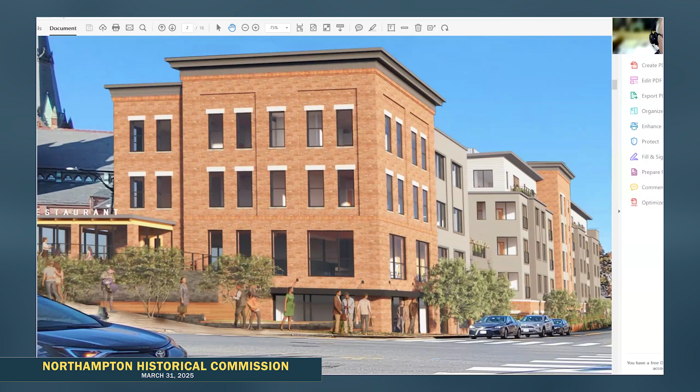We are maintaining a larger glass here into the restaurant on the second floor, which is interesting because the first two floors of this building are commercial. We have the cafe downstairs off the park area, then the restaurant up above, and it's not uncommon even in the downtown buildings to have these larger openings, peering into the main public spaces of the building. We're adding, as you can see, some...

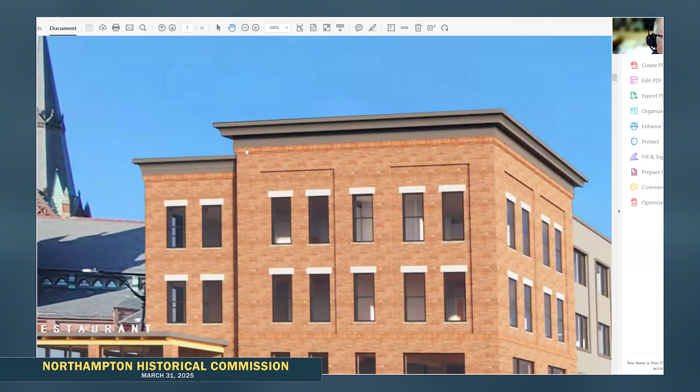Actually I have some detail shots that are going to be a little more helpful than this shot. I think I'll get into some of the brick detailing aspects when we're looking at those images.

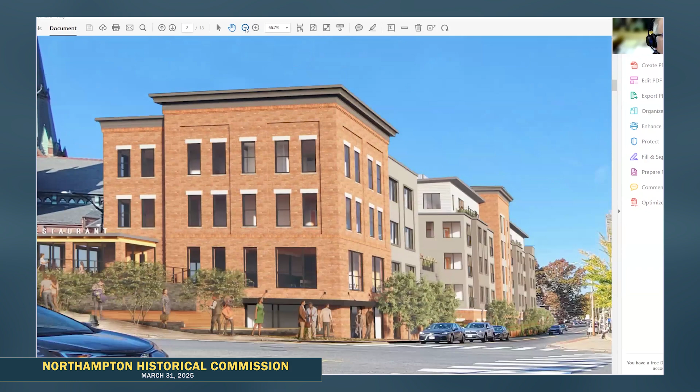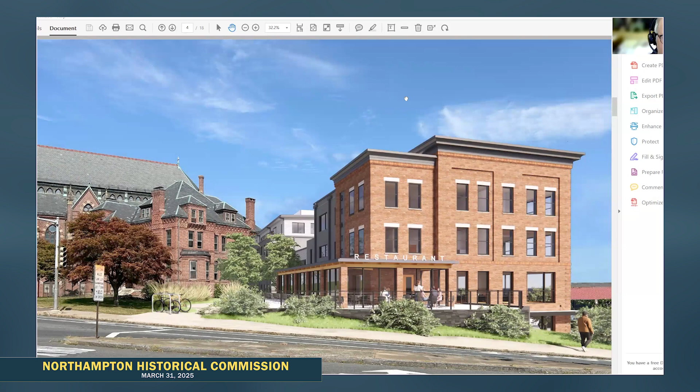This is as you move up the street, looking into the upper terrace of the upstairs restaurant. This again was the initial design you saw last meeting, and here's how we've modified it. You get a sense of the cornice being a nicely proportioned cap that helps anchor the building. We think visually it picks up on the brick detailing and adds another layer of interest and historic relevance to the building and its relationship to the downtown fabric.

I do have a Google Earth shot of the street, which I can bring up a little bit later, just to give everybody a reminder of what downtown Northampton looks like.

Not that you necessarily need it, but moving up the street, this is what we saw last time, and the big difference again is the addition of this cornice line along here, because in this elevation we're not really changing the window patterns, the fenestration, or the idea about the signage, but as you turn the corner, you will pick up the read of that cornice line.

So just to back up, as you're coming down the corner...

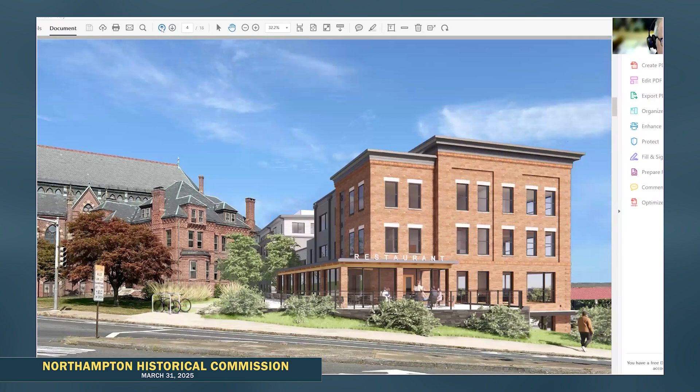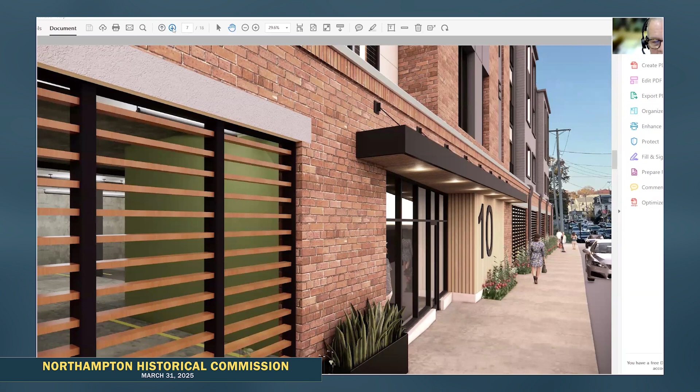This is a view of the entry that we showed you last time, and this is what we've really been focusing on with the planning board, is what this pedestrian experience is like along the length of this parking garage elevation of the building.

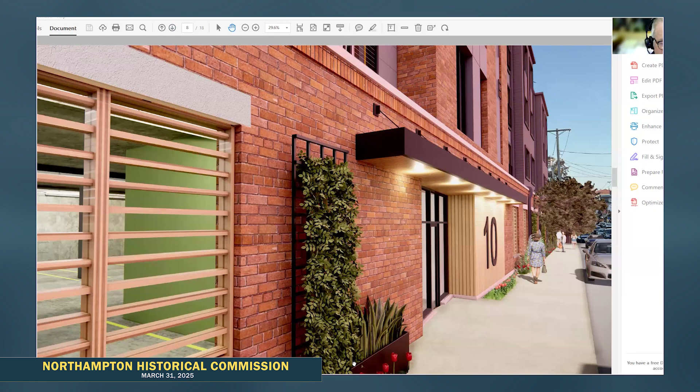So what we've done here is we've added these trellis planters, which are going to extend out of the ground planters that we have, which are all part of the stormwater drainage for the building, capturing downspouts. We've added street trees in along here, I think 6 or 7 street trees, which again is going to help soften and humanize and make this a more pedestrian friendly street, cooling and helping reduce heat island with these trees, and creating more shade.

This is the view from last time, and then how we're currently envisioning it, with the addition of the trees and the planters.

Again, you can see how these downspouts come down here and then run behind these wall planters, and then into these stormwater rain gardens here along the street edge.

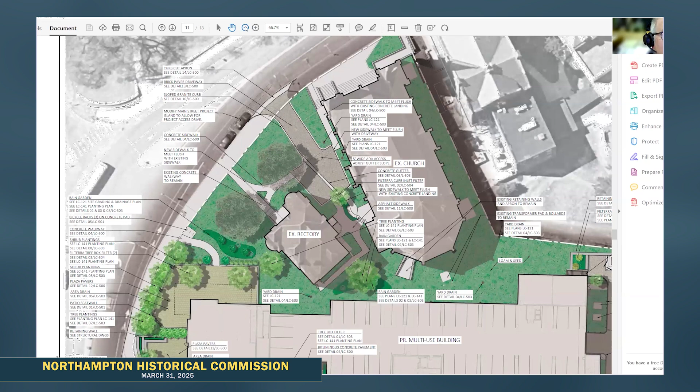These are some of the images we have of that, so just a little bit of a bird's eye view of the outdoor dining for the restaurant, and stepping down that lower terrace off the cafe that's right on the corner of Elm and Main.

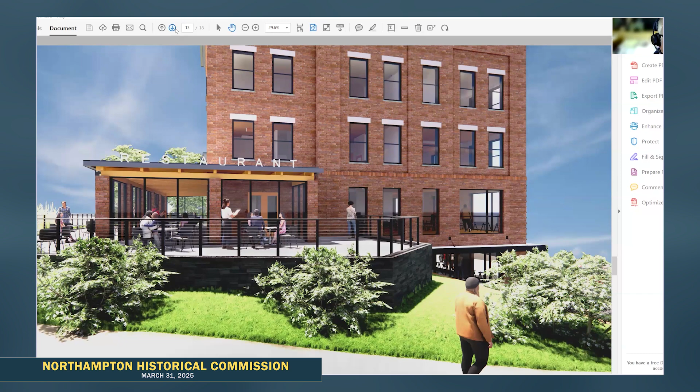Again, as you're walking down the street, this would be a view if you're standing at the curb on the sidewalk on Elm Street at eye level, looking into the restaurant dining area. There's a nice landscape buffer zone between the raised dining terrace to help create scale and separation and make it more pedestrian friendly. The building's not right on the street, it's stepped back, and there are these layers within the site that help soften that feel.

This is the terrace off the lower cafe area, carving into the site as it slopes down from Elm Street, creating this nice outdoor garden area. Again, the stepping of the terrace, the layers, and the landscaping and greenery all help soften up this corner and buffer the building from the street, so it doesn't feel like it's right on the street, but separated by these layers of a pedestrian friendly experience.

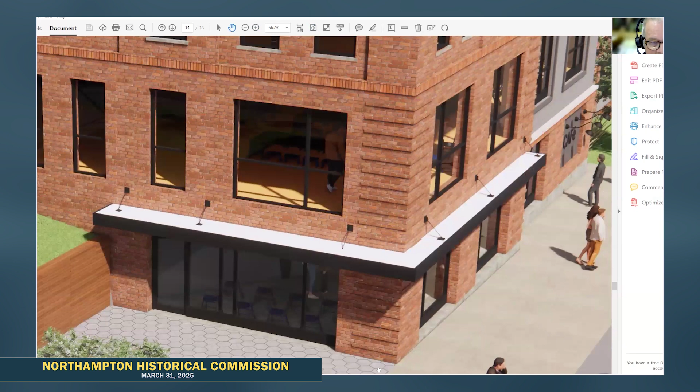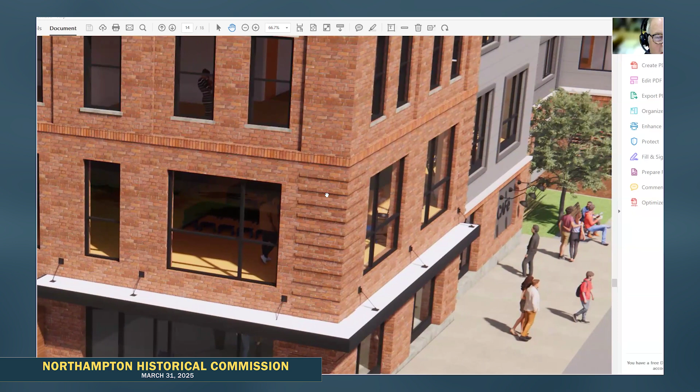This image helps you start to read some of the brick detailing here. We're adding this quoined brick course that runs up the first two stories of the building, which helps create a gravity and strength of form for those elements, as well as interest in the brick detailing. There's also a soldier course brick band that wraps around the building, separating the commercial from the residential.

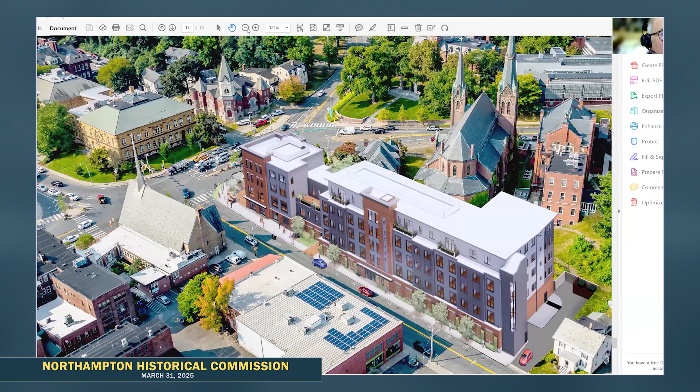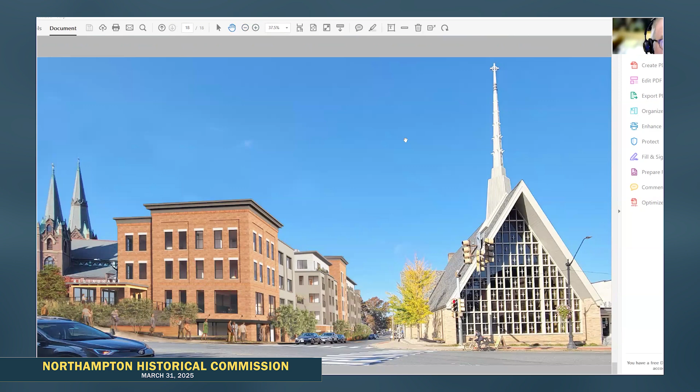Let me just bring up this one Google Earth image to show you what we've been looking at. I think I have to stop share... new share.

Some of the cues we've been looking at are the nicely proportioned cornice line that helps cap these buildings, some of the recessed bays, which we're picking up in our brickwork, and also the articulating lintels over the windows. These are arched, ornate lintels. We're doing something a little more straightforward with a horizontal lintel over the windows, but we feel what we're doing is in spirit, not replicating it, but honoring it, in a way that's in the spirit of what these buildings are doing scale-wise, and in the articulation of the materials and window and facade treatments.

So I'll end on this image and turn the floor over to the commission. Thank you, Charles. Thanks a lot.

Thank you for responding to all of our questions. So what we're going to do is we'll do the round again, have the commissioners ask questions, get clarifications. We'll also hear from members of the public if they wish to speak, and we also will then provide our thoughts about how we think this is or is not adhering to our design standards. So let me open this up to questions for the commissioners first, and I'll start with Hannah.

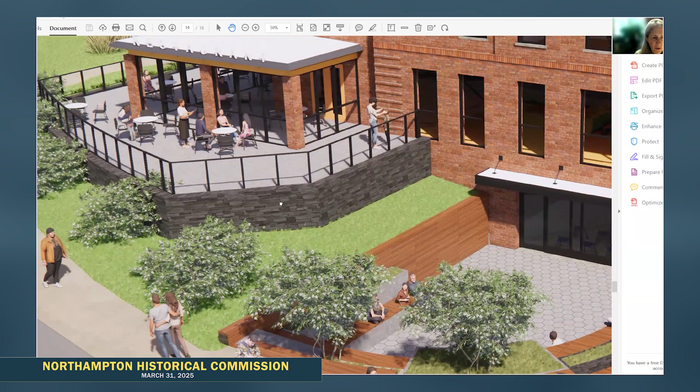Then I would encourage you to think about doing a street tree planting along here with trees that have a high canopy, so that they're going to get tall and the canopy is up high. That will bring this building more into scale with the street itself, and also provide you with the shade you're going to need long term. I'm sure our city arborist has a lot of suggestions for good street trees that would fulfill that criteria, but I would seriously look at that.

Here we have the trees along State. I'm looking at the upper right-hand part of this picture, and it looks like the tree is just sort of plopped into the sidewalk, and that's just not going to work. So what I'm suggesting is you make a strip all the way across the sidewalk of permeable pavers, and then do a structural soil system underneath there.

I wish I had the site drawings. That's sort of an artifact of rendering, a facsimile of reality. We're not showing the tree grates, but they're going to be there, and I'll certainly pass along the suggestion of the permeable pavers to Berkshire Design Group, and we can also look at some larger trees along this edge. I don't think that would be a bad thing.

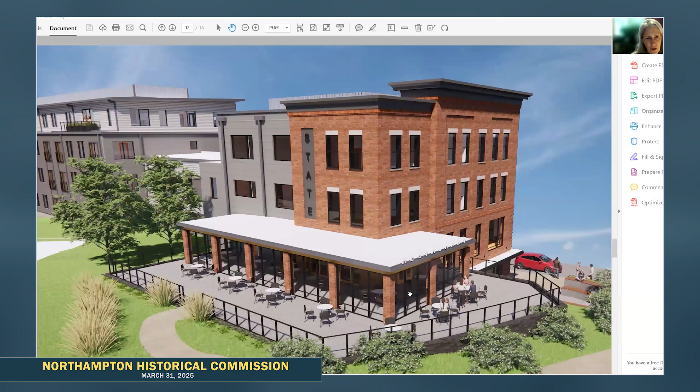The other thing is, one of the concerns I have about this commercial space is that if it remains vacant for a long time -- and as you know, we have a lot of restaurant spaces in Northampton that are vacant and have been that way for a while -- so what are your thoughts about that? Because I think having an empty space like that in such a prominent location sends out not a great message.

Shaw, do you want to share your thoughts on that? Yeah, I'd love to.

Thanks everybody for listening to the presentation. I just wanted to touch for a second on the trees. Part of the plan we provided to planning had a cross-section. The details for the trees have been completely passed through the regulations and stipulations for the tree root. There's a large-scale structure that goes underneath the sidewalk to create a much larger area for the tree to grow into the future, and unfortunately we don't have a cross section of that. It's something in the range of 7 or 8 feet by 8 feet square, 5 feet tall, all full with structural soil for the tree. But regardless, this has been addressed by the landscape architect.

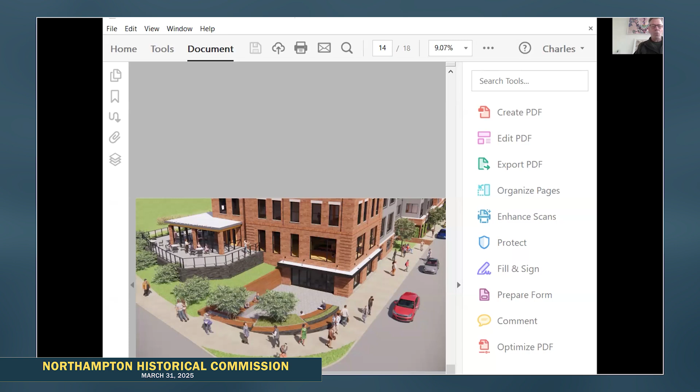However, going into the commercial side of the restaurant, there's an absolute fear and concern about the viability of the commercial space. At this point, the best way for me to think about it is the concept that if you build it, they will come. I'm thinking the vision is that this spot is going to be such a vibrant new part of town, bringing something that hasn't been in town. The one thing we don't have is parking, but other than that, that corner could potentially draw all kinds of people and action between the resident side and the academy, with the beautiful location it has with the patio.

That is our focal point -- we believe we could bring in a restaurant that will fill the space. And if it doesn't, it's going to be difficult for us to maintain it financially, and we may end up theoretically looking for a different type of commercial space to fill in if it doesn't work out. But our vision is that we will make any effort to maybe partner up with a restaurateur to assist them in a build-out to make it viable. So we would assist the building, it would assist downtown, and in return downtown will assist the restaurant. So that's my comment on the commercial space.

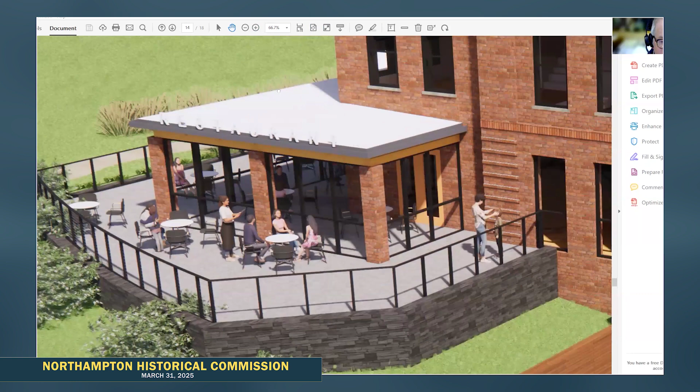So the idea is that we're using a combination of wood, stone, planter beds, and then the brick on the building to create a sense of warmth and natural materials to bring life into this element here. This would be a concrete retaining wall with a wood lattice screen attached to it, so it actually pulls it away from the brick. I know, Douglas, you mentioned you like the brick here, but I think there's a really nice thing happening with the wood and the brick coming together, with the wood being this warmer material that people are in contact with, and it wraps around and becomes this bench.

So you can see this, along here is sort of a line that could be a bench, and then it's separated from this bench here with the built-in planter that steps, and then this bench kind of wraps around the entire inside of the park, and comes around here to where these folks are sitting. So again, the bench wraps around the entirety of the park, and then it steps here as the street steps down, as a combination of bench, planter, and platform.

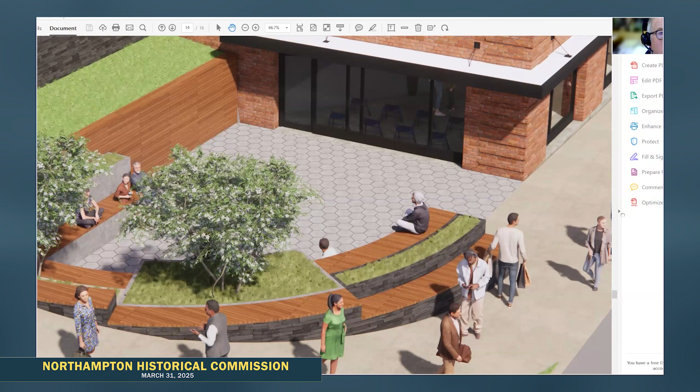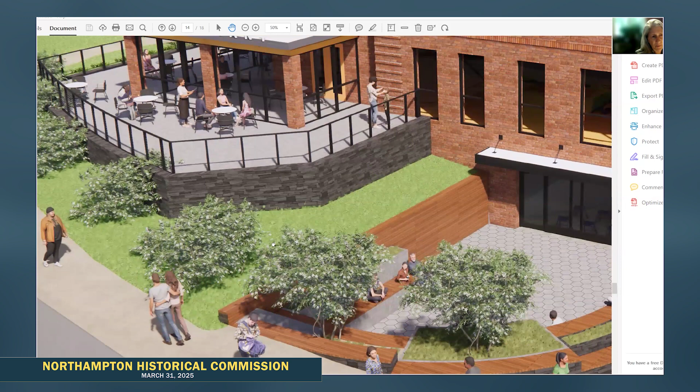And I guess when we're talking about larger trees, is this the area where we're thinking maybe the trees get a little bigger? Yes, exactly. And I would encourage you to look at pulling that - I don't know what's happening with the site long term, and maybe this is more directed at Shaw - but pull that street tree line up. Don't just stop at the building, go as far as you can without disrupting your ability to redevelop the other buildings, just to get the trees established.

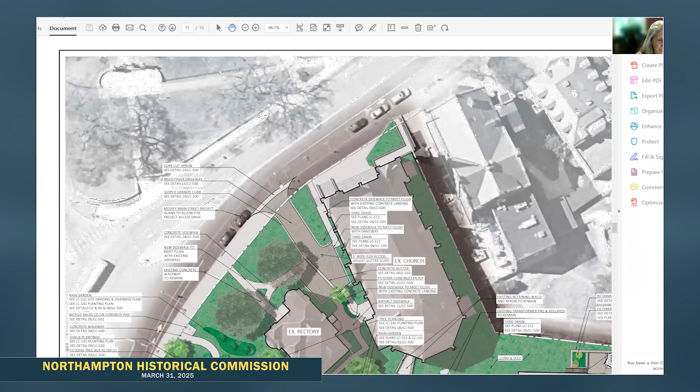I think that will help pull the site together in the interim. So bringing the tree line up to here - there's a nice big existing tree there. Those are Japanese maples, as I remember. Yeah, they're lovely, but they're sort of mid-size, not a super large, super tall street tree kind of tree. So I'm not suggesting you deep six them, but you may want to think about that for the long term, and in the interim, bring the street trees up.

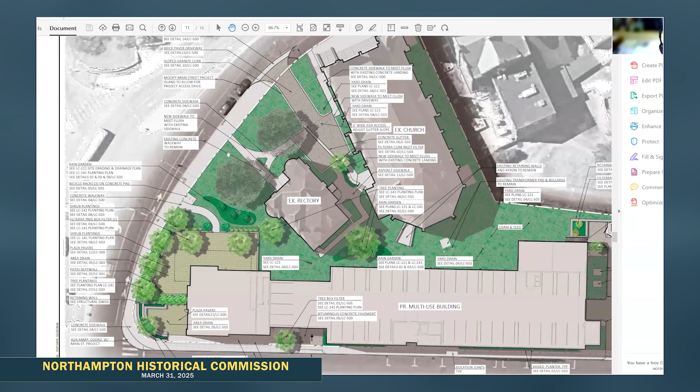I'm just not sure how they would survive in the understory of a larger tree, and you wouldn't want to crowd them out. So that's something Jeff can certainly look at. Okay, yeah.

Okay, and then, I mean this is really more in your design development stage, but the wood that you're planning on using on those terraces - again, if I'm getting ahead, tell me.

Are you thinking of a tropical hardwood? Thermal treated? We wouldn't be using teak or mahogany or anything like that. It might even end up being a composite material that will be stable and not stain, warp, or crack and check over time, but have the warmth of wood. What exactly that material is needs to be determined in the end, but the idea is that it will have the character, feel, and warmth of wood.

Okay, Douglas, does that help you at all? Do you still have questions? No, it does help.

You see all the people gathering in Pulaski Park, so always be thoughtful of how people will gather here. I do see the inner ring and so forth, and I think the street trees over the shrubs is a good improvement. But it's more of a question of how will the pedestrians interact with it. Will there always be a row of people sitting on that outer curve, waiting for the crosswalk light or so forth? Just have those thoughts in mind.

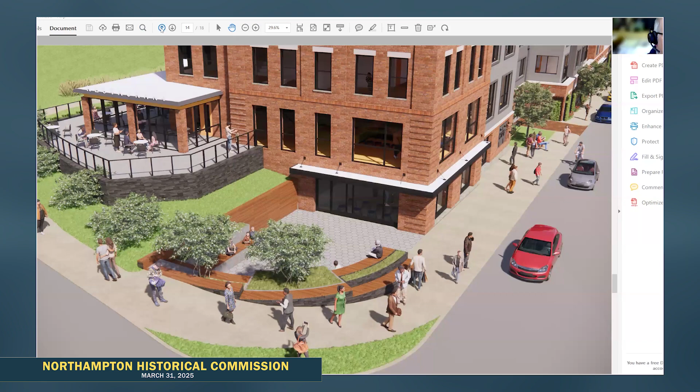Any other comments or questions by the commission? Michael? Charles, could you bring up the image from the Elm Street side looking back, that we have the rectory on the left-hand side? Let's see if I can navigate there without getting lost. Okay, yeah, this is the view.

Garrett's question had to do with this, and I wanted to ask about it because I don't want to be like, well, this is just my taste — we could go on endlessly with things. I think you've been very responsive, Charles and Shaw, to the input we've given. I do sort of think there's a kind of thinness and verticality here that Garrett was pointing to, and he was asking if brick could continue over. I understand the middle building is behind the rectory, is that correct? Yeah, correct. So there would be a logic to continuing the brick over to the middle building and giving that a warmer feel there on the corner.

I know this is about cost, and it's also about the LEED energy efficiency stuff. I don't mean to be a pain, but I think he has a good question there. Visually, to me, that's a very vertical strip of brick that just stands out. Now, I understand we don't have trees yet and other things going on, but my question would be, following up on his comment, what do you think about that visual there?

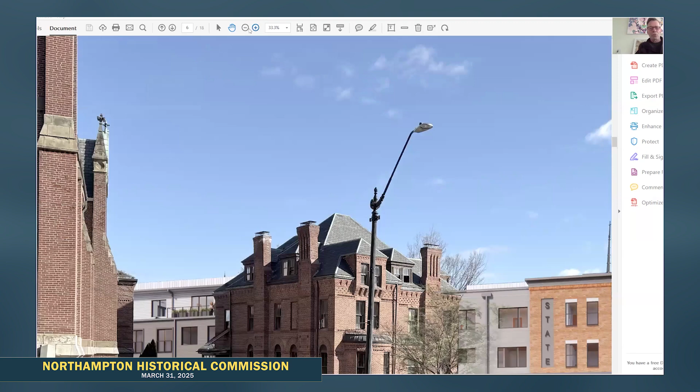However, having said that, the last thing I'll comment on is that some of the details are still just a rendering — it's just a computer rendering. It really doesn't, you do the best you can to give it a feeling, to put in the little details of what the window frame is like, what size it is, and the glass, but it's still a rendering. In real life it's going to have so much more depth, color, and warmth. Thank you.

Who am I interrupting? Oh, Michael? This is Charles — I was just going to make one comment, sorry.

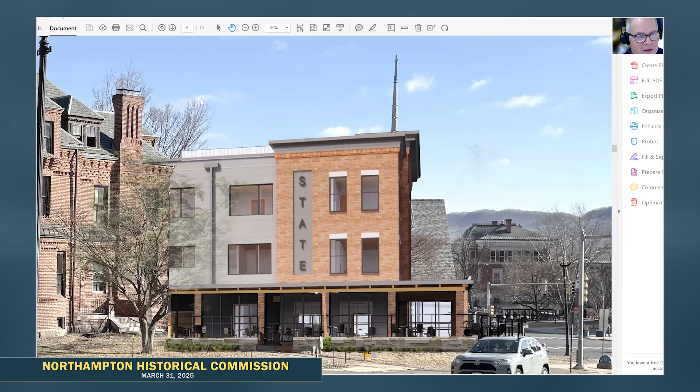A couple folks have referred to the concrete, but this gray is actually a fiber cement, which is relevant to what Shaw was just saying. There is detail in the way these elements go together — there are reveal lines, there are panels that read and help break down the scale further, so it has a life of its own. They're not just concrete surfaces. Just wanted to clarify that.

One thing that might address this is to look at a bit of a darker shade on that. I think we started out with it being really light — was it like white before? We have darkened it up considerably. But think about the letters on the state building you have here — if it was that dark, I think it would recede more and allow the main block, the corner block, to be a little more prominent. I'd just suggest you play with the colors and see what you think. I agree with you, Martha. Yeah, okay. That might be a simple fix.

Charles, what is the proposed material for the cornice structure above the brickwork? It's probably going to be built up out of wood, or composite material, or a fiberglass fabrication — something that's painted to look like wood but needs to be durable. It can't be needing repainting all the time, so it needs to be a material that's durable, holds the paint, and has the appearance of being permanent. It could also be metal. So I think that's still to be determined.